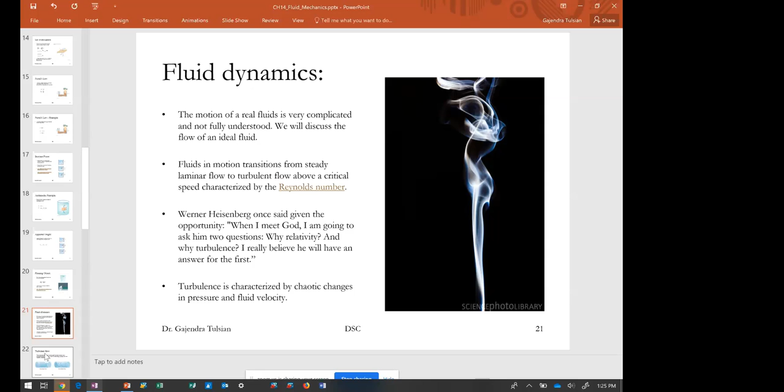So turbulence is characterized by chaotic changes in pressure and fluid velocity. So if you were standing here and measuring the velocity of the smoke, that would be pretty steady. But if you measure the velocity of smoke in the turbulent area, that would change chaotically. So it won't be steady at all. And the pressure there would be chaotic. If you put a pressure gauge there, it would be chaotic. The pressure gauge here would read a steady value. So turbulence is a very tough subject, and we'll talk about it briefly, but we won't deal with it.

Now, the reason we are interested in this is, let's say this was oil flowing down a pipeline. To make a fluid flow, you have to have a pressure difference between the ends. And if the flow is laminar, the pressure difference for a given flow rate has to be much lower than if it's turbulent flow. So to pump the same amount of oil in a turbulent flow, the pressure difference would have to be a lot more. That means it's costing you a lot more energy. So it takes a lot more energy to pump fluid when turbulence is present.

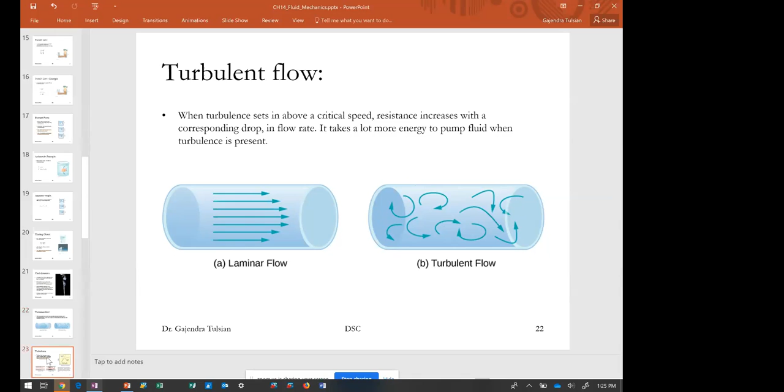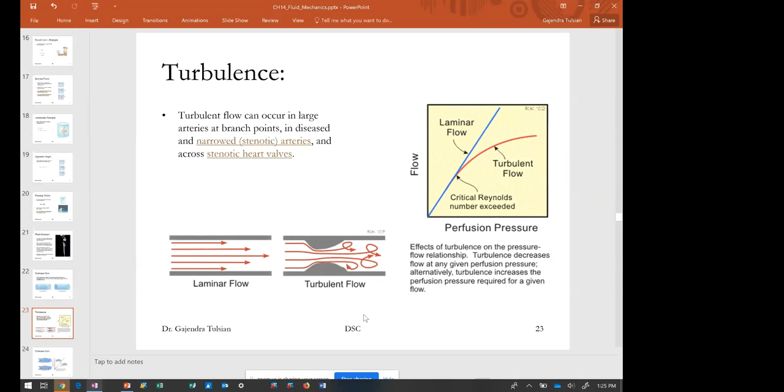All right, like I said, we won't be talking about turbulence much other than the fact that it's not good for you. So this is laminar flow, this is turbulent flow. Again, for a given driving pressure under laminar flow, you get a much higher flow rate than under turbulent flow.

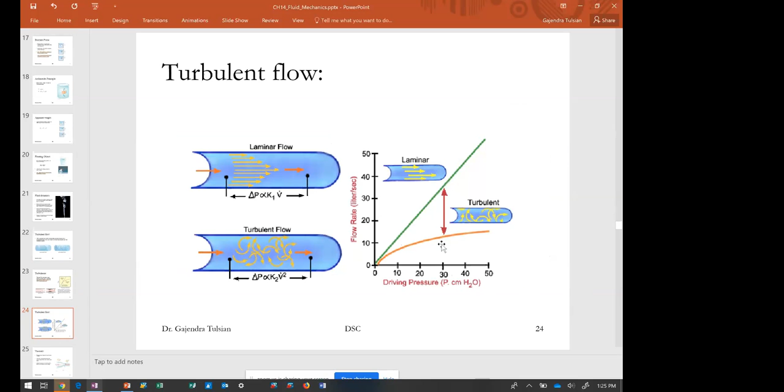Viscosity is friction. So because of greater friction, if you wanted to pump honey through a pipe, for a given flow rate it takes much more energy to pump honey than water. So viscous forces cause resistance when two adjacent layers of fluid move relative to each other. So viscosity is the friction force between

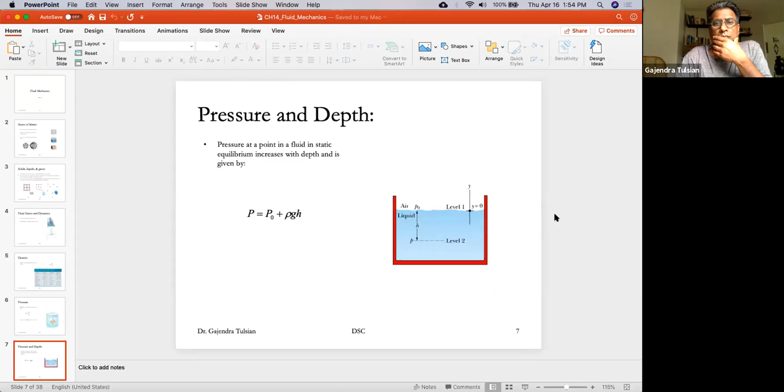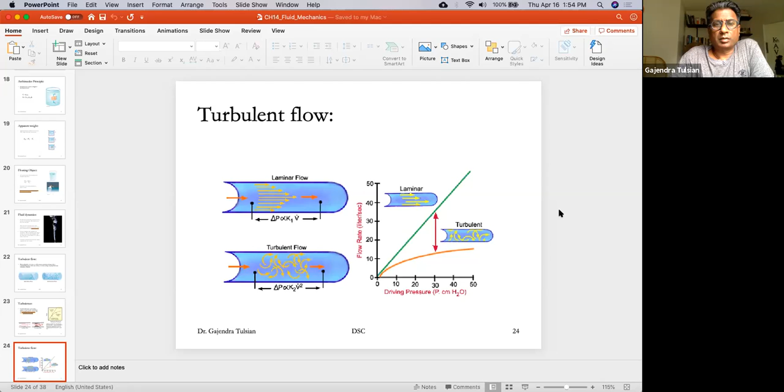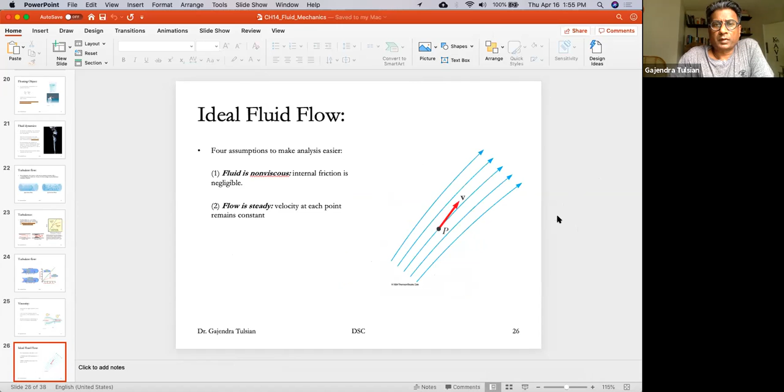Okay. Yeah, but I'm still in class. Hello. So at what point did we get kicked out of the meeting? Can you tell me what slide we were at? Slide 25, okay. All right, thank you. All right, let me see if we're recording.